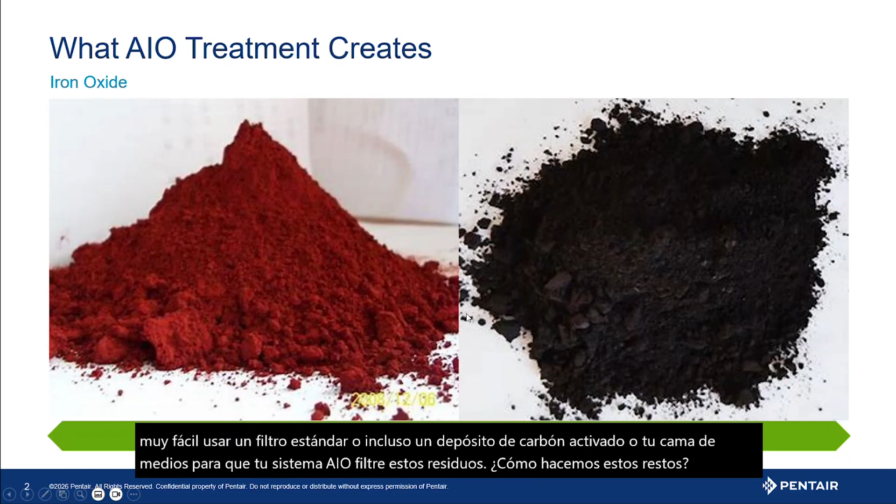But once it's in this form, it's real easy to use a standard filter or even an activated carbon tank or your media bed for your AIO system to filter this debris out. How we make this debris matters to us. We want to make big chunks of iron so it's easy to remove. And that's what we're talking about today, looking under the hood. Because once we make that particle size, we can filter it out.

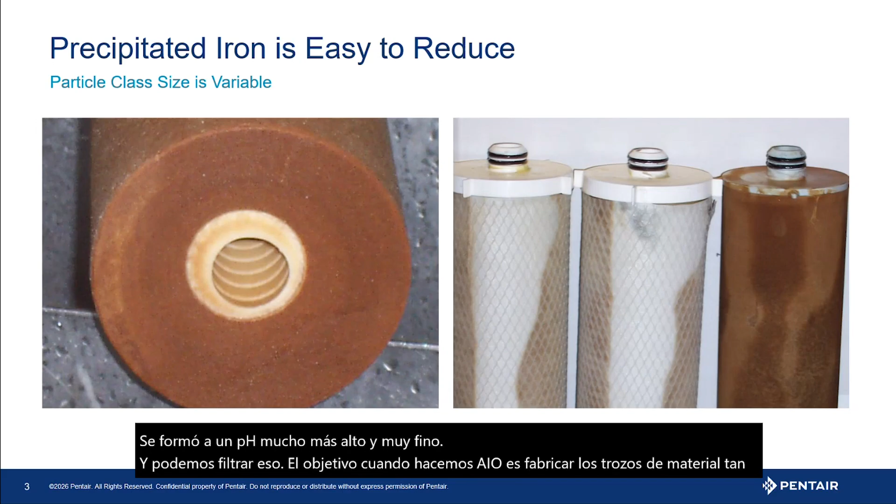This is a 25-to-1 DGD filter. And one of the things to note about this is you can see here, this is the 1 micron core. You're still getting some fine particulate through. And this is iron that was formed at a much higher pH and very finely. And we can filter that out. The goal when we're doing AIO is to make as big chunks of material as we can to make it easy to filter out.

So when we oxidize iron in water, we are going to do two things. We're going to pull hydroxide out of the water. Iron hydroxide is the rust we're trying to make. And we're going to leave the other hydrogen from the water in solution. And that is now acid. Acid is hydrogen ions in the water. So for every molecule of ferric iron we produce, we're going to create 2 ppms of acid.

So this tells us that we have to manage our pH in order to maintain iron precipitation. Why? We need OH in the water to do this. So if you don't use a pH management media and you're trying to remove iron, you're going to drop the pH in that water, and sometimes, depending on the concentration, precipitously. So we want to make sure we're managing this pH relationship.

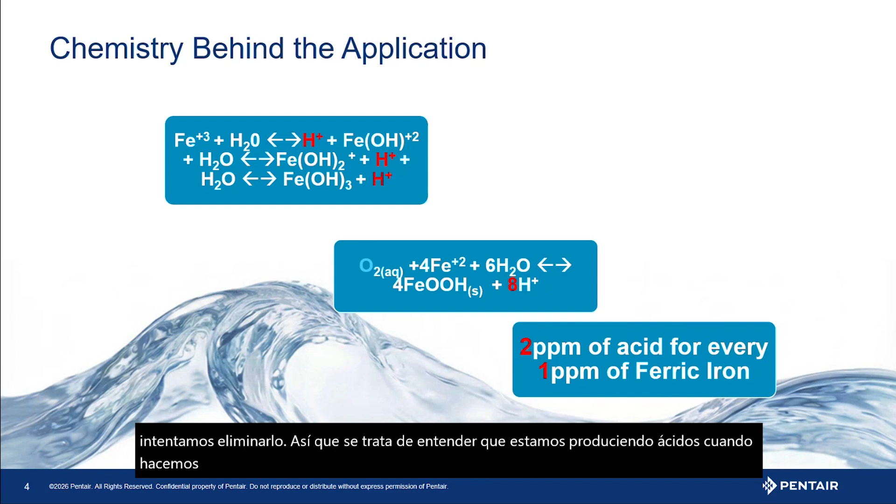Why? Ever pour a little vinegar on some rust and watch it bubble? Well, if the water's pH drops low enough from oxidizing the iron, we're going to redissolve that iron back in the solution, which isn't good because we're trying to remove it. So it's about understanding that we're making acids when we're making that rust that we're going to filter out. And that informs you why we have the medias we do.

As we approach 80 degrees, we get drastically less amounts of oxygen dissolved in our water. So if I'm someone in the southern United States or in the tropics or someplace traditionally warm where you may have outside systems, I need to account for this.

I may have to regenerate more frequently in these circumstances, or ensure my unit is placed someplace out of the sun so it doesn't cook, so it performs better in that environment. Simple things like installation envelope will matter here.

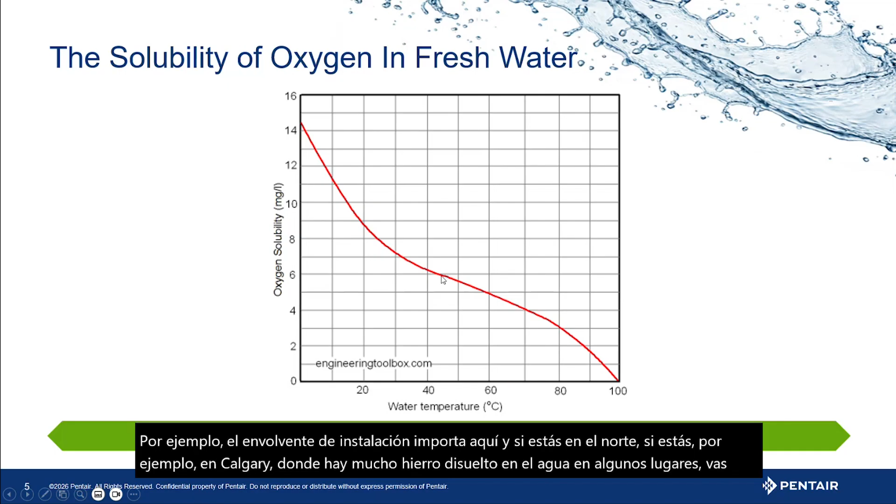And if you're up north, if you're in, let's say, Calgary, where they have lots of dissolved iron in the water in some locations, you're going to get really good performance out of these units because the water is colder and it's going to dissolve better.

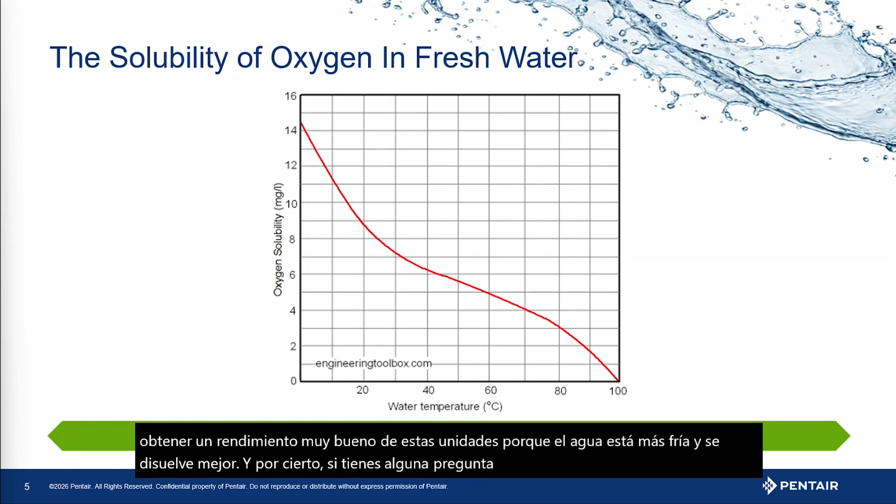So when we look at this chemistry, you can derive some rules of thumb about how to oxidize iron and produce rust in water. And this is garnered over decades of field experience and hard scientific research from the folks at the U.S. Geological Survey exploring this phenomenon, as well as wells being drilled across the country.

So for iron to be oxidized, pH and alkalinity play an important role. Why? pH, we need it above 7 to have extra hydroxide in the water so we can precipitate the iron. We need alkalinity in the water, Tums. This is our buffering system to resist that pH change.

So depending on how much alkalinity I have in the water compared to how much iron, I may not need to manage my pH. In other cases, I will. In some cases, I shouldn't. And that's important to understand here.

So the rule of thumb to use AIO effectively is you want a starting water pH between 6.5 and 8.5 in the tank and an alkalinity above 100 milligrams per liter to absorb the acid that's produced, to buffer it. Also, in this process, this number will come down in the final product of the water because we're breaking it down to CO2 and gassing it off.

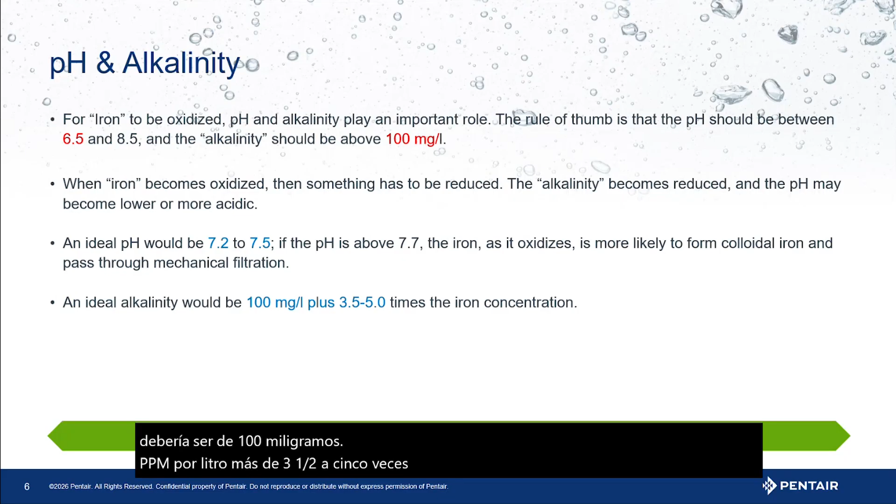So the ideal alkalinity in your water should be 100 milligrams per liter, ppm, plus 3.5 to 5 times the parts per million of iron. So in my system at home, I have 2 parts per million of iron. I need at least 100 plus 5 times 2, which is 10. I want 110 ppm of alkalinity in my water to resist the pH change from me oxidizing the iron.

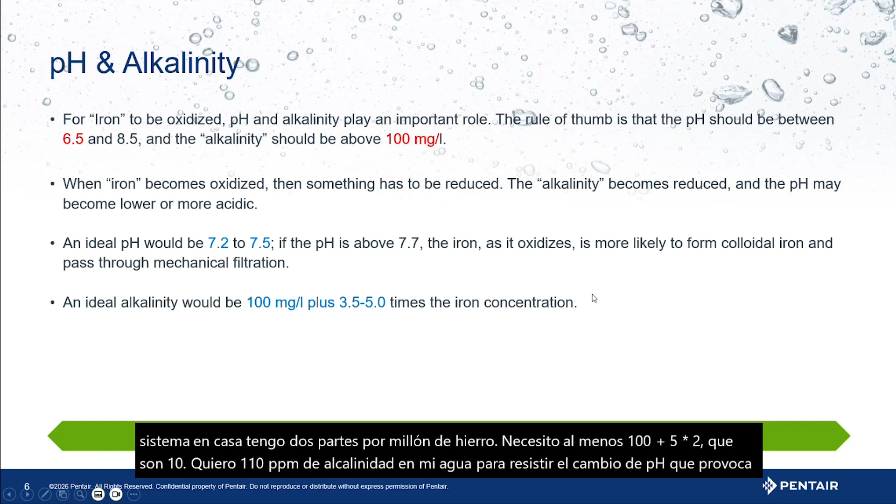So what does an air injection system do for us? Well, it takes our iron treatment, puts it into a one-pass system where we're using a generally considered safe reagent, air. And we have to remember that air is only 20% oxygen. So only 20% of that bubble trapped in your tank is there for oxidation of iron.

So this is a smaller footprint, fewer things to go wrong, no chemical pumps, no chemical storage, which can be rather a liability risk in family homes, or just management or infrastructure from fumes. You don't want your chlorine injection right next to your house furnace because the fumes are going to eat up your furnace, that kind of stuff, right? You want to manage that. This simplifies iron removal and removes any of those risks involved with it.

It has the same operation as a standard softening valve. The only difference here is instead of drawing brine, we're drawing air through a dual check valve, so it prevents the air from going back out the port. And our regenerant is air, or the atmosphere.

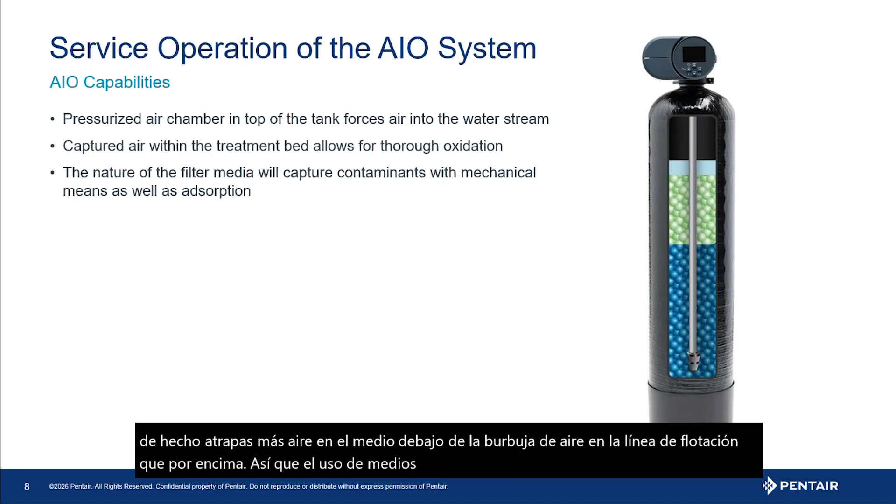those bubbles that stick to the side of the glass, the same behavior happens here in the tank, sticking to the granules of media. And you actually trap more air on the media below the air bubble in the water line than you do above it. So the use of media definitely augments these products and their performance. What media you select is going to be based on your water chemistry.

Now, when we think of backwashing AIO, this is critical because we have to understand we are making debris, dirt inside these units, and also handling the incoming dirt load. I would suggest that if you do return visits to validate operation, you evaluate backwash at the time you do those visits. If you have dirty water in the last 2 minutes of your backwash, you need to add 5 minutes to your backwash time. That adds 1 bed volume of water through the tank if your flow controls are sized properly.

Why? We need to get that dirt and debris out of the tank. If we don't get a good backwash, we're going to leave dirty water up inside the valve, and when it switches into service, you may get a little bit downstream, but to the life and operation of the valve, you're leaving dirt and debris to drag back and forth through that seal and spacer stack, and now it's a hard particulate of rust. So make sure you evaluate your backwash on AIO.

Make sure it's getting the tank clean between regenerations, because we don't want to leave that iron in there to be a source of food for iron bacteria, and we don't want it building up in the bed, period, as that builds up over time.

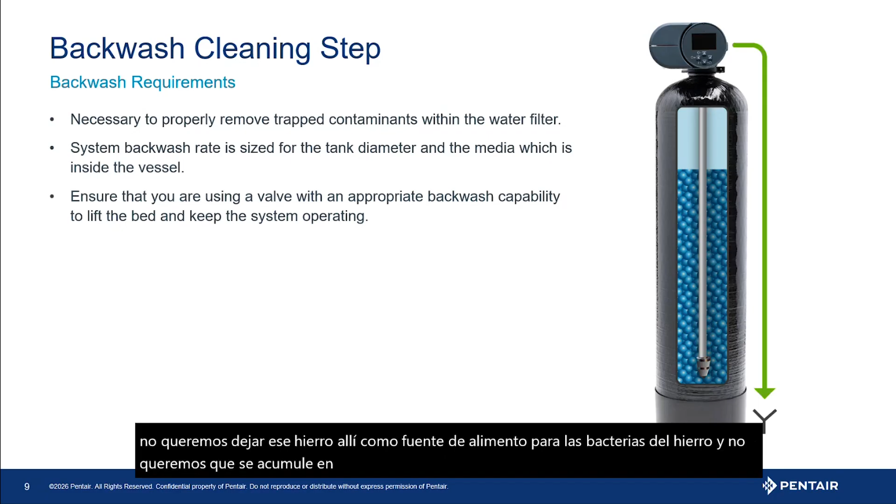Now, the air draw, this is just like your brine draw step. It comes out of the box programmed for 60 minutes, but how you tune this to your tank size is by watching the first regeneration, time it till it gets to the bottom, and add 10 to 15 minutes to give the air a chance to stick to the wet media. You don't need the full 60 minutes here. We just include that in the base stock programming to cover the full range of tank sizes.

My 1 cubic foot unit here at home is set for 27 minutes to drain the tank plus another 10, 37 minutes. Okay, this uses a number 2 injector, so it's drawing in large amounts of air. If you have issues with iron bacteria in the area, you want to make sure that the area this is drawing air from is relatively clean. If it's a wet, musty basement, you may want to think about adding an aftermarket HEPA filter to the inlet to prevent bacteria from being drawn in.

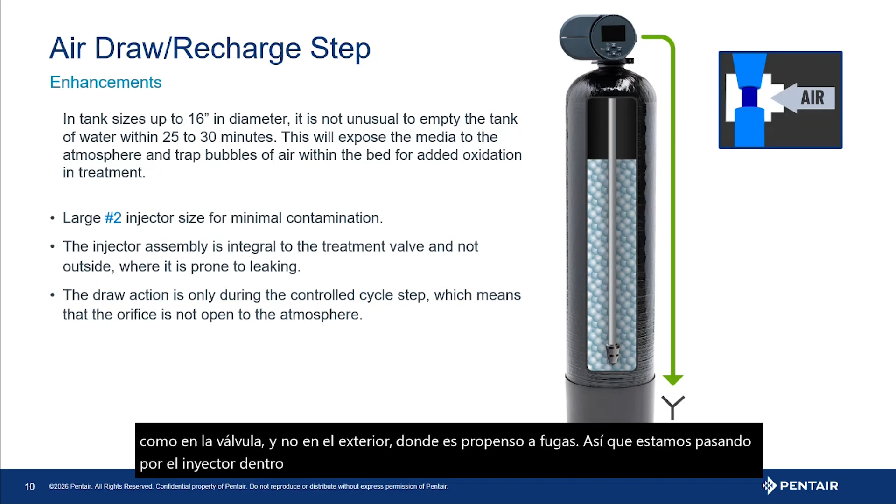We are drawing in atmospheric air here. The injector assembly is integral to the treatment and the valve and not outside where it's prone to leaking. So we're drawing through the injector inside the valve, not external. It's not hanging out in space to get hit by anything moving by as well.

Now, rinse to service. This is after we've drained the tank. We want to rinse this and flush and fill the tank, which then pressurizes that air bubble at the top of the tank to the pressure we have in our water supply line. So this will actually trap more oxygen with higher pressure water systems. It's just how that works.

And when we rinse to service, you're going to hear cascading water down through the tank. In the service cycle and in rinse, this is a natural noise to get. Why? We're dropping water through air onto a watery surface. If you have very sound sensitive customers, you may have to manage that issue there. It's really not all that loud at all, but I have had customers that were extremely sound sensitive in my past as well. So you may have to cross that bridge when you get to it.

Now, that's a sign that the system is actually working. Now, since we're running water through a gas and picking up that gas, we're dissolving bubbles in it. If the system is working well, you're going to see some effervescence at the tap.

We're going to get some air bubbles out. That's natural. If you have some bubbly water that comes out, those bubbles will disappear in short order after standing. It's no different than, let's say, a Perrier or something like that in experience. But that's the trade-off of using a generally considered safe reagent like air versus having potassium permanganate or chlorine or hydrogen peroxide injection systems in a home. And it takes some of the burdens of compliance for driving on the road away from dealers.

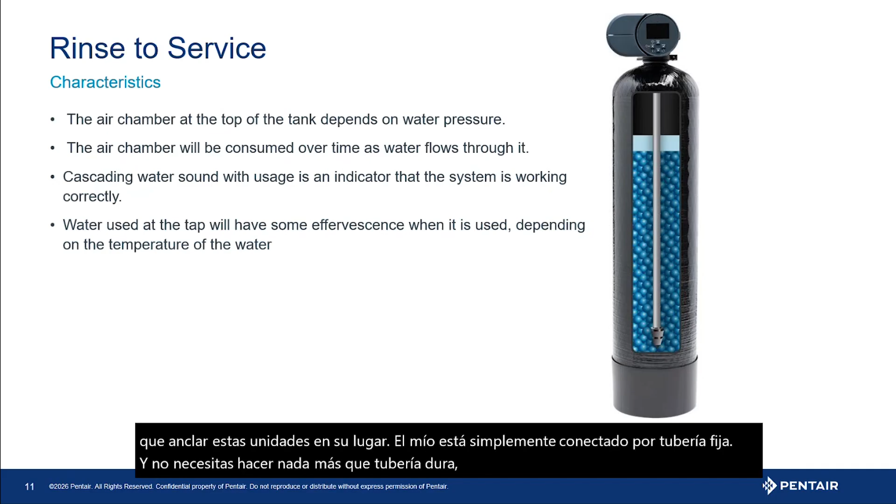The other thing we want to know about the service cycle is on backwash. You must anchor the backwash lines on these systems because when we go into backwash, we are going to be pushing air and water out together, and that makes a whole lot of competition for getting out the pipe first, and it can cause some splashing and moving of pipes around. So on these systems, you must anchor these units down in place. Mine is just hard piped in, and I don't need to do anything other than hard pipe. It doesn't jump around, but I would anchor it if it was in a customer's home for sure. Make sure you're anchoring these lines when you install them.

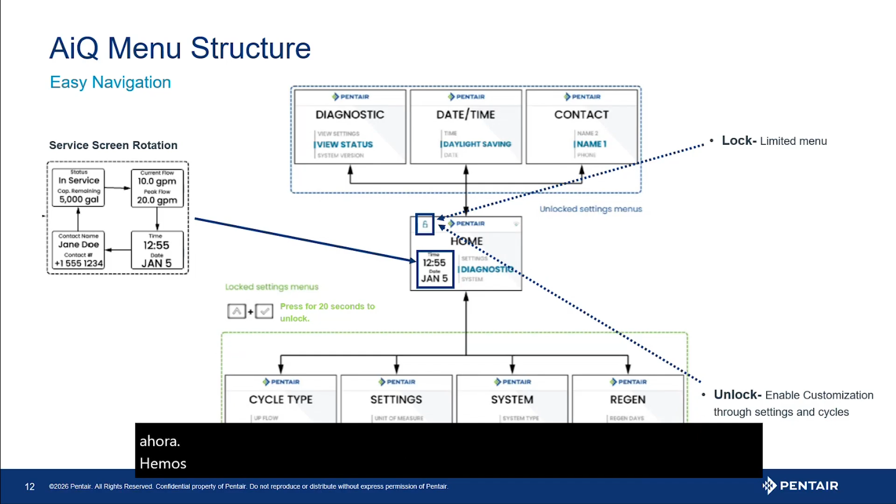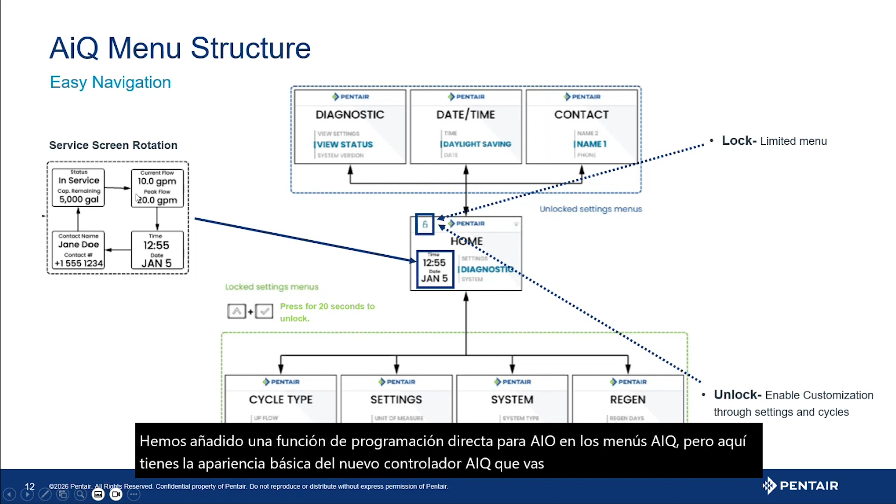Now, we've added a direct programming feature for AIO into the AIQ menus. But here's the basic appearance of the new AIQ controller. You're going to get your service rotation right here between gallons remaining, flows, peak flows, date, and your contact information here. And when we go into this, it just shows the program settings. But once you get past the initial program settings, you're going to have your cycles that you can pick.

You can pick softener, filter, or AIO, where it's labeled air draw instead of brine draw. But understand that this is a filter setting with one additional feature. So this way you can have it congruent across your product line. It's an AIO, but it's really a filter with a special step, or a softener without brine refill, if you want to think about it that way.

Now, a lot of these medias, the oxidative medias like Katalox and manganese oxide like Birm and things like that, or even activated carbon that you may use in these applications, may require a soak time to get them prepped. Well, here you can use our custom feature to program steps in any order you want, but you can also use our startup feature in the menu and create a startup cycle to soak the carbon for 24 hours, go into a rinse and a backwash, go through that. And once your startup sequence is finished, it will revert to the programming for normal operation. This can save you a lot of time on site or even in your return trips to do a validation in that setup. You can precondition the media by programming it on the unit, which I love as a technician.

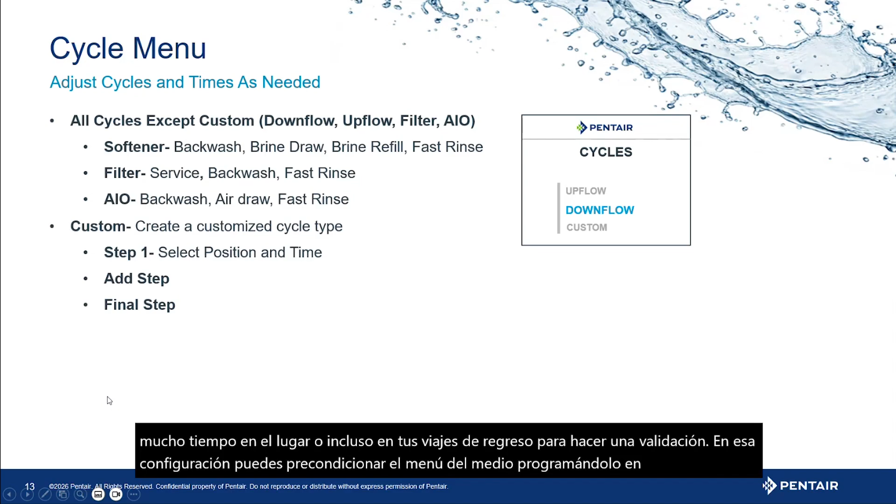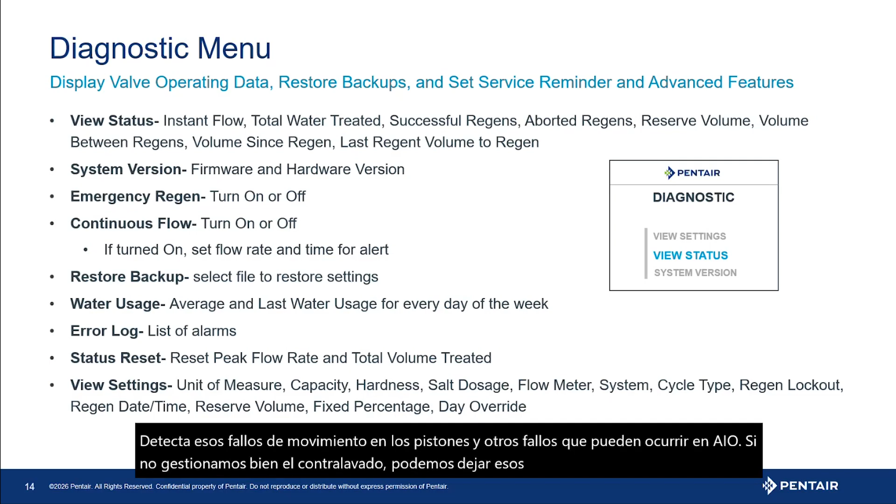The diagnostic menu, what's a little bit different about this menu than in the past is you're going to get a couple of things that you didn't get before: successful regens and aborted regens. This is going to catch those failure-to-move pistons and those sorts of failures, which can happen in AIO if we're not managing our backwash properly. We can leave that debris up in the valve body and lock it up. We want to get as much life out of these as we can, so manage that backwash and understand you're going to see that here.

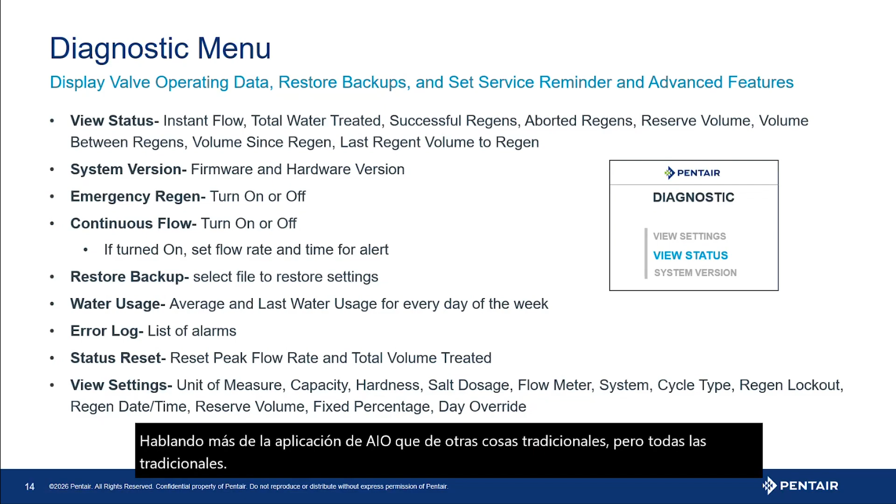You can restore backups on it. You can have continuous flow detect issues for those slab homes down south, and you can get into your view settings, all the standard stuff. But I want to keep talking about the application of AIO more so than the other traditional stuff. But all the traditional error logs and data is here as well, and it can be exported.

Now, iron treatment happens in reality, and reality is filled with a lot of unexpected chemistries that we didn't want to think we had to deal with. Oh, I'm getting drinking water for a home, right? So some of those challenges start with selecting the media. The media in my house that I use in my AIO here in Northern Illinois is activated carbon, because I have 2 ppm of iron. My pH is around 7.8. It's in a good range to produce rust. And I have 300 parts per million of alkalinity. So I have plenty of buffer. That's why I get to use activated carbon in mine.

I'm using that acid to lower my alkalinity and lower my pH. The pH that comes out of my AIO in my setup is 7.2. My alkalinity is dropped down between 180 and 200, and no iron. But I also get the benefit of organics removal in that same package. So understand that there's wiggle room for the medias you use.

Now, let's say if you're out in Maine and you've got a pH of 5 coming into your home, magnesium oxide medias don't function well below 6.0 pH because the acidic water starts to break them down. That's where you're going to use something like calcite. That's a sacrificial media. You're going to want to use a dome hole tank with that application to refill, or a Corosex, which is a mix of mag oxide and calcite, right? That way you can elevate the pH and your alkalinity at the same time, so you can then oxidize the iron.

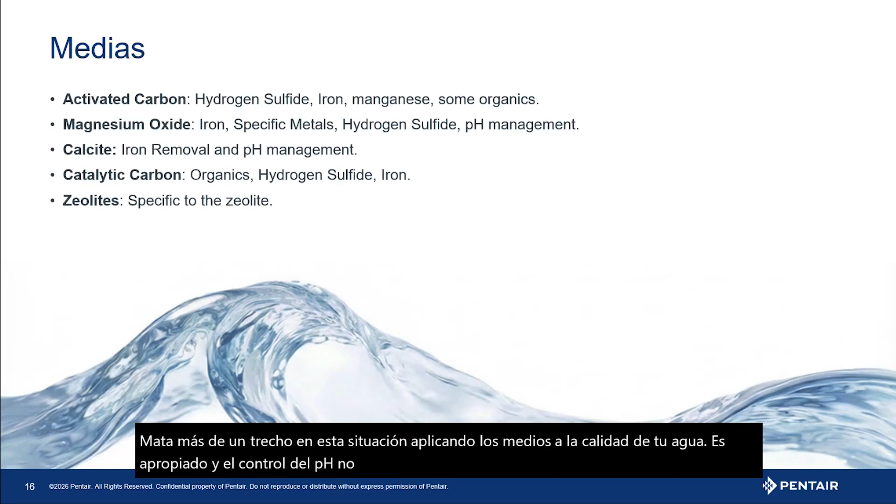And pH management is not applicable to every iron removal scenario. It just applies to most of them. The other thing that can be problematic about iron formation and rust formation is colloidal iron. This is when we make iron at a relatively high pH in water, above 8.5, and it's so fine that it blows through half micron cartridges. And the only solution to this sort of problem is a UF filter. An AIO will not remove it. This water looks colored, but it's not from dissolved iron. It's from super tiny suspended particles, kind of like dust floating in the air, but it never settles out.

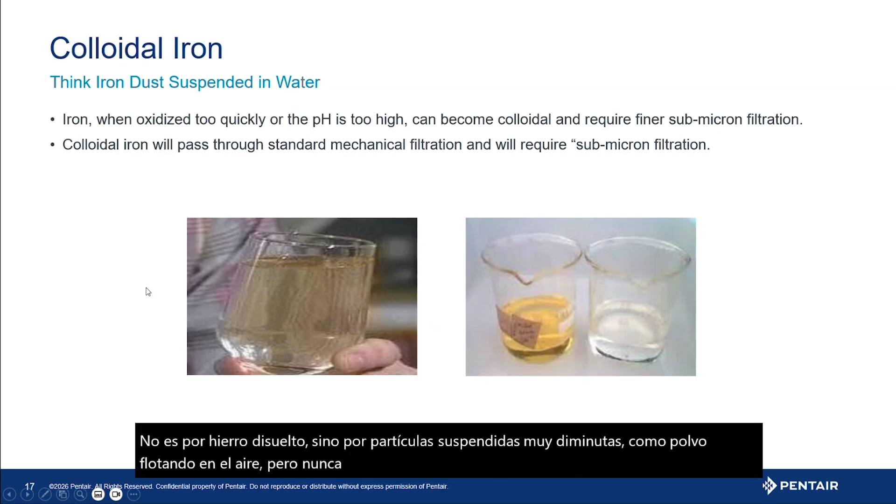The other one that's a little more problematic, and this tends to appear in shallow wells or wells with steel casings that cracked up near the surface at some point in time. The most common organically bound iron that you and I are probably familiar with is hemoglobin in your blood, where an organic molecule uses iron in the center of it to stick oxygen on and off. Well, organically bound iron in nature tends to be bound to things like tannins and humic acids, and these are very, very difficult to remove. Why? You have to either break down the organic molecule and remove it with carbon or oxidize it directly, but you're dealing with anions and cations here and metals mixed together. You need to understand what's in your water.

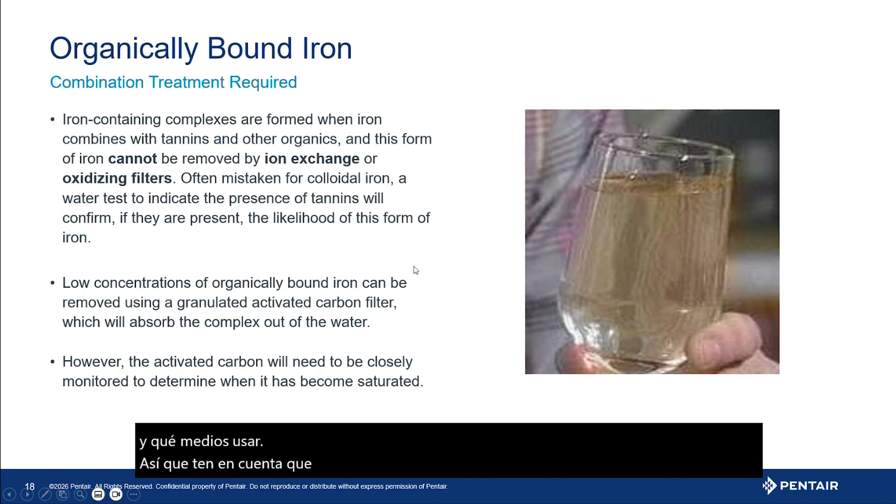An AIO system will not remove tannins well unless it's coupled with an appropriate technology. And in most cases, you're probably going to want to use a stronger oxidant like chlorine or hydrogen peroxide to attack your tannins. But discuss your water qualities and what medias to use with your distributor as well. So realize this can be very, very complicated to remove organically bound iron. This stresses testing in the field.

And then there's our wonderful friend iron bacteria. If you have iron bacteria and it's in ones and twos, it's not a large colony, you may want to consider suppressing it before you let it into your AIO, or adding antibacterial medias to your AIO applications. Why? This stuff feeds off of iron in the water for its biological processes, and it likes living in the dark. Well, an AIO filter creates wonderful conditions for this bacteria to grow in because we're dropping all its food out right on top of a filter bed where it's stuck too.

So make sure if you've got iron in a well that you test for iron bacteria or are familiar with it in your community. If you have it, you may want to suppress it before it gets into an AIO, or choose a dual-pronged approach to kill bacteria and oxidize iron, which can be tricky to do. So evaluate your water before you make technology selections, especially if you have stuff like iron bacteria in your water system.